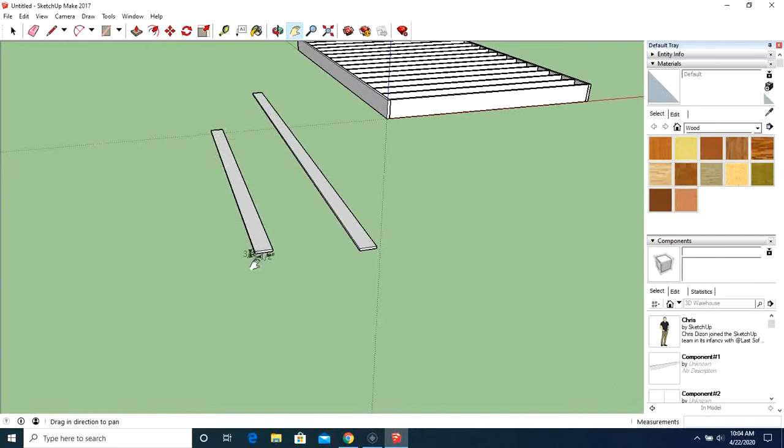First of all, I would suggest making the deck boards off to the side, what I like to call the lumber pile. Actual size is going to be 3/4 by 5.5, and the spacing is going to be 1/16. These are going to be components.

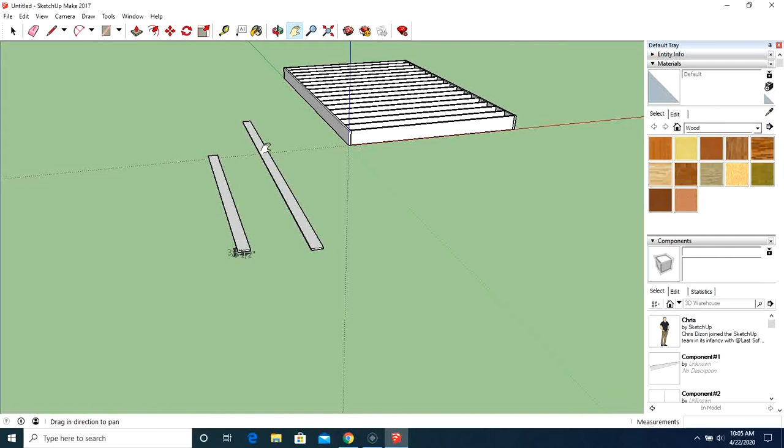For this demonstration, my deck is 16 feet long, and so is that deck board right there. So I'm going to grab the deck board, grab it by the bottom corner, copy it,

and place it right on the corner. Now to space it 1/16, what I'd suggest is grab this corner here, and you're going to have to move it over 5.5 plus 1/16. Now, depending on what kind of mathematics you're comfortable with, 1/16 in decimal form equals 0.0625, and 5.5 is 5.5.

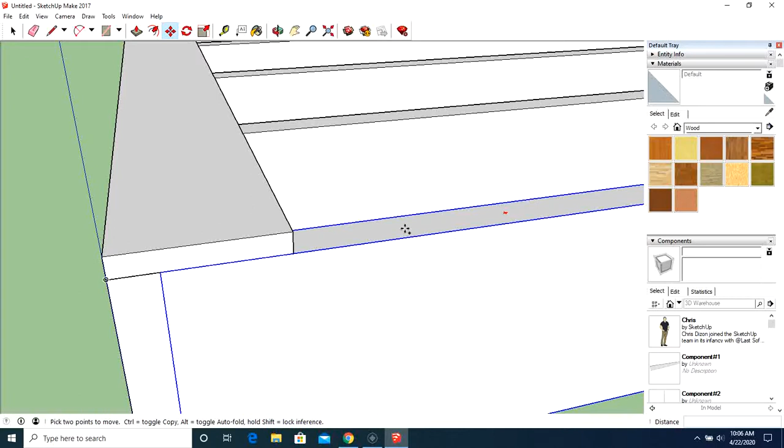So if you're going to use decimal, it'd be 5.5625. So I'm going to move it from here, drag it along there, and type in 5.5625 inches. Now if we check with our measuring tape, we're going to see a space of 1/16.

Now if you want to use that number I typed in, and you want to type it in fractional form, if you're comfortable adding 1/16 to 5.5, you can type that in as well.

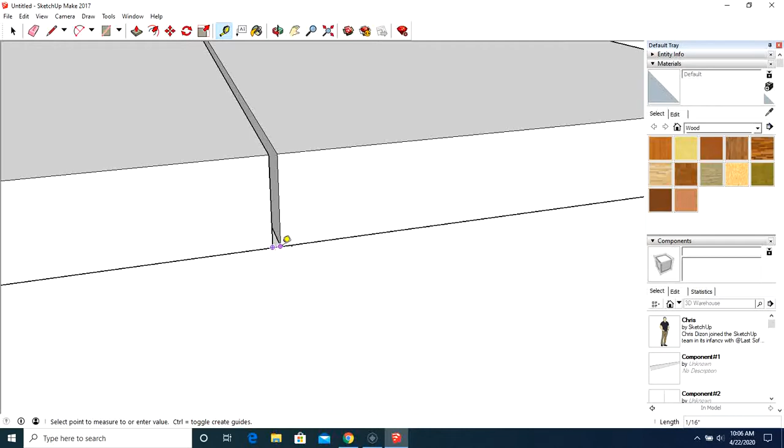So what you're going to do is repeat that process all the way along the top of your deck. Please keep in mind that deck boards are going to go perpendicular, or the opposite way, of the frame, so they support your deck boards.

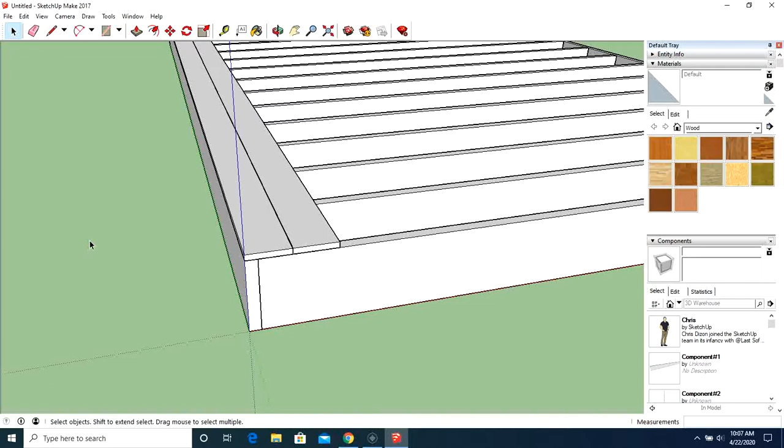Now some of you might ask, can I array? You can array, but the onus is going to be on you to come up with a number that creates an even spacing, probably with the exception of the last board, of 1/16.

So for this particular assignment, what I'm looking for in terms of marks is this: the board is 3/4 by 5.5, the spacing is 1/16, and the entire deck is covered.

Okay, that's it for this demonstration video.